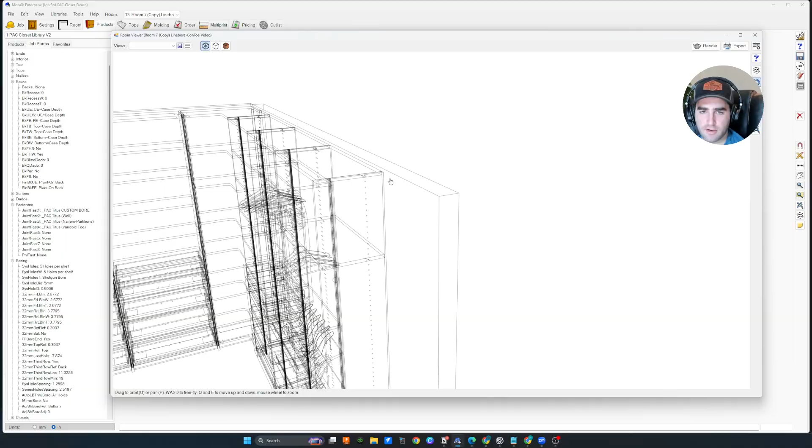I'll show you what that does, because the next thing we're going to turn off is in Boring. All three of these top parameters are going to be set to shotgun bore. You're just going to go in here and select the one you want. Let's do 5 holes per shelf, referring to the adjustable shelf.

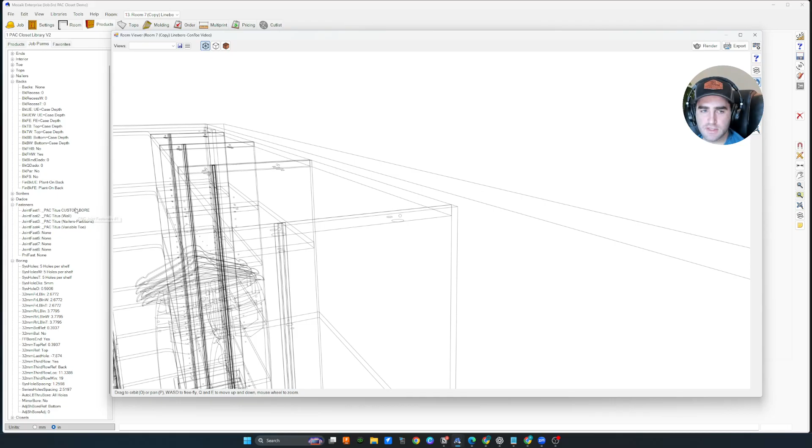You'll see now that we've turned those off, we still have holes. If we didn't use this custom bore fastener, those outriggers do not make their own holes with the original tool group - it's relying on the line bore being in the right place, which has its advantages. But for custom bore, we have to turn on the custom bore fastener. If you don't have that, it'll be in this lesson and you can just download it.

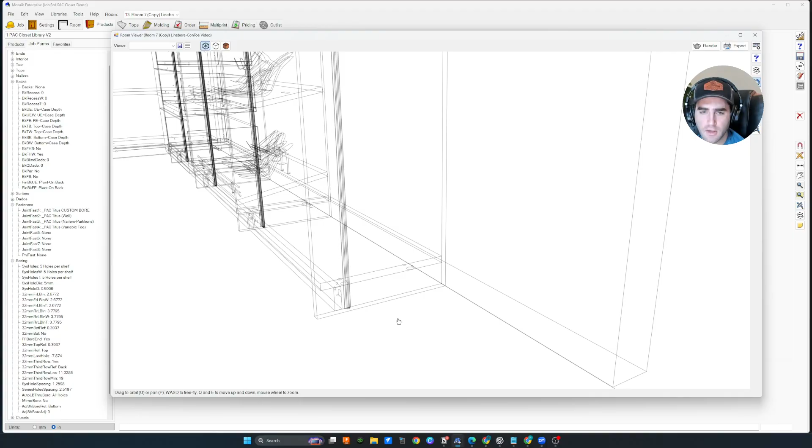Other things that we're going to see here: these outriggers down below have their own holes, the fixed shelves have their own holes. As long as all that looks good, you're decent on the fasteners.

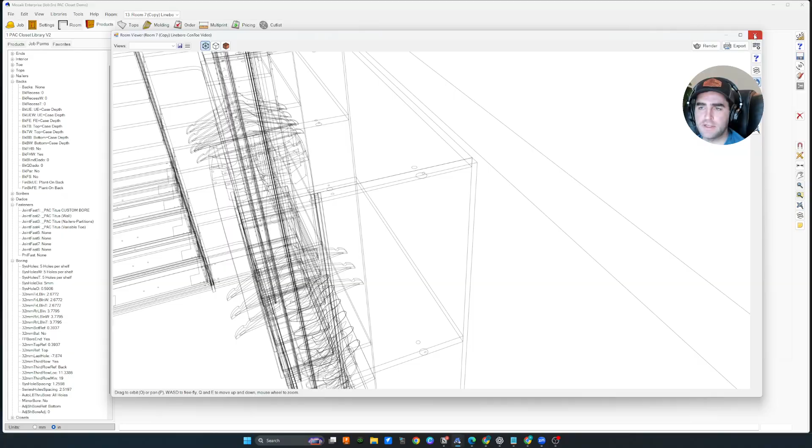Now we do obviously have this LED channel in the wrong place. I was probably messing around here.

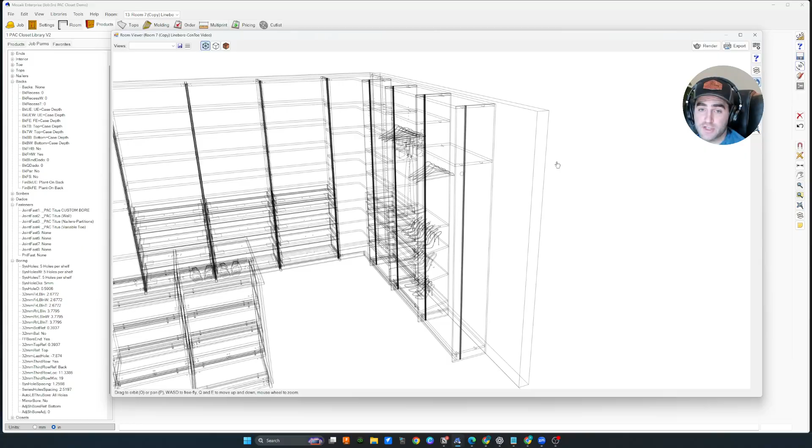The other thing we want to look at, and really want to think about, is that now that we don't have holes for our closet rods and our fixed shelves are custom boring, it really matters where these things are positioned. So you just added a bunch more work to your manufacturing checklist, because when we go into elevation, wherever these fixed shelves are located, that's where they're going to drill holes. So we no longer have that kind of adjustable nature, which is fine.

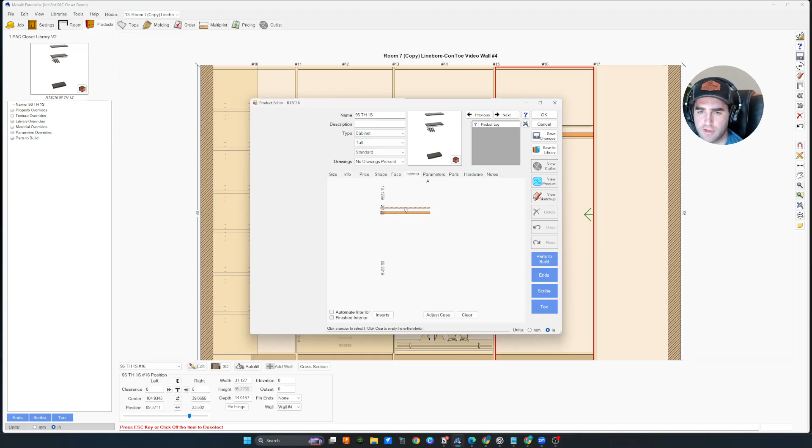It's not a big deal. You just have to double click and edit, go in the interior tab, and move these things up and down. So you want to move your fixed shelves - if this matters to you, this is a long hang, it had it at 70 inches. It doesn't matter, I'm going to move this up.

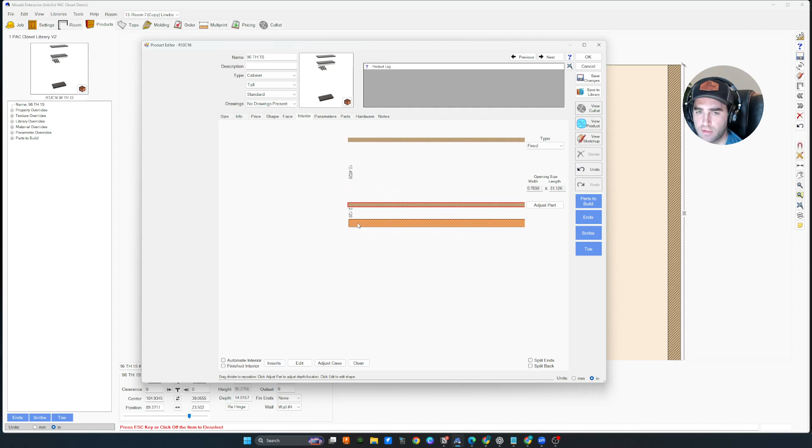When you do this, when you move the fixed shelf, make sure that your closet rod still has the same amount of space, 2 1/8 inches, inside this little box here. If it doesn't, it will be drilling holes at a different height.

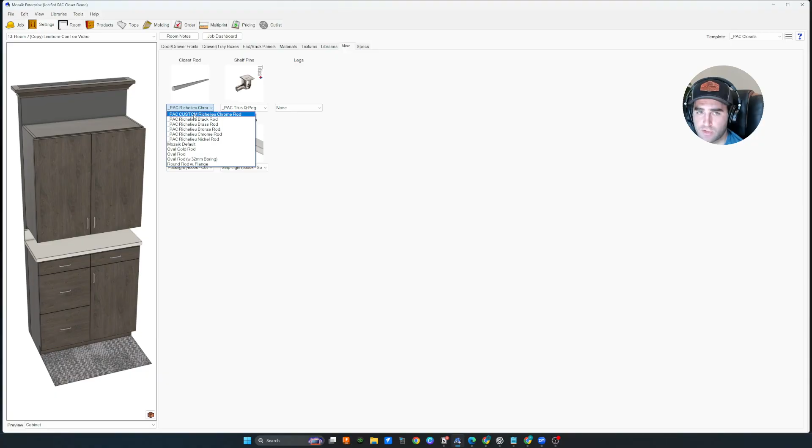You can leave the holes off for your closet rods, or you can bore for your closet rods. If you go to settings, and then if you go to miscellaneous, in closet rods, you can pick the PAC custom boring closet rod. And then if we go back into the room, you don't have that.

It'll also be a download. Kind of useless if you don't have the actual library, but anyone could download it.

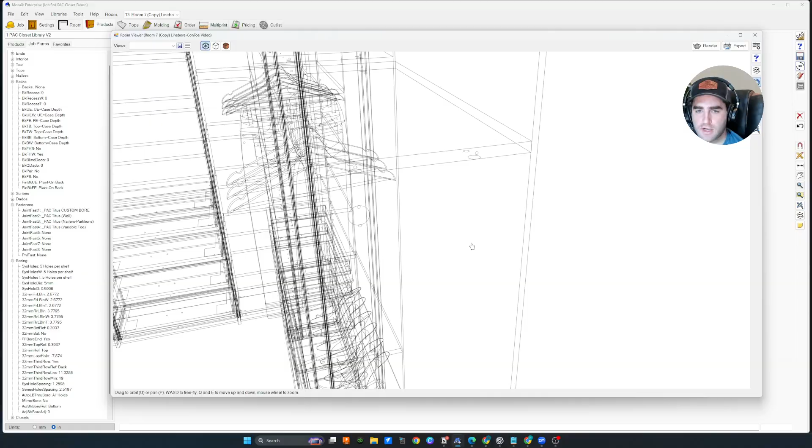Okay, so now when we look at this closet rod, obviously our LED is still a little bit too close, but we can move that very easily. Now the closet rod makes its 2 holes. So if that's not in the right height, you're going to have 2 kind of random holes.

Not going to be good. So just check it over and make sure these are all at the right height. If you need to, you can just rebuild the interior section.

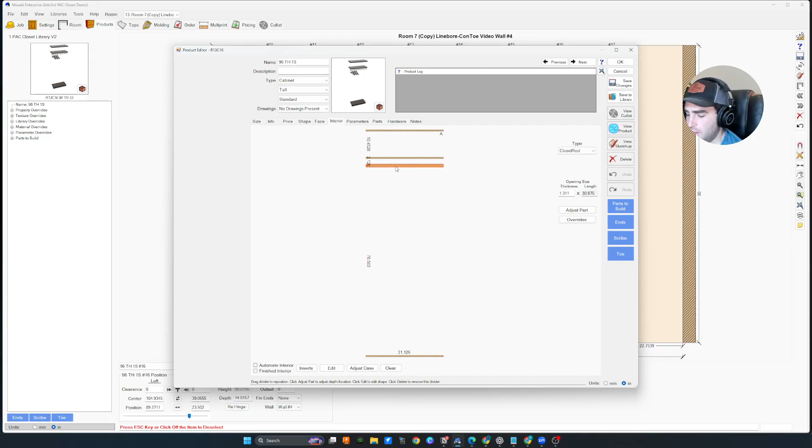One kind of quick trick for getting these closet rods, if they're refusing to get back into 2 1/8 spacing, you can just delete them and make another one, and when you make one, it will go to that 2 1/8 spacing every time.

All right, so other considerations for this line bore being gone. One important one would be for angled shoe shelves. You need all the holes for angled shoe shelves, otherwise they won't be adjustable. You can make them fixed shelves, but that's just weird and risky unless you really, really have those heights defined.

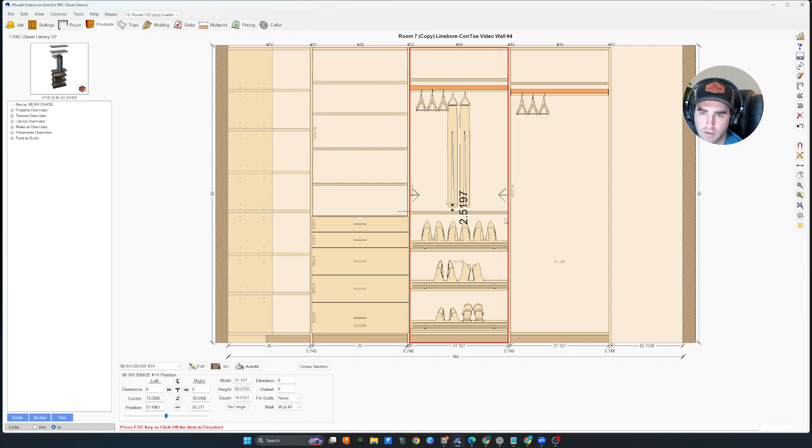So this angled shoe shelf right here, we've got line bore turned off for the whole library. So what you'd want to do is edit, go into parameters, select product parameters. We'll go into the boring category. We'll bring in the top one and we'll change it back to line bore, well, shotgun bore.

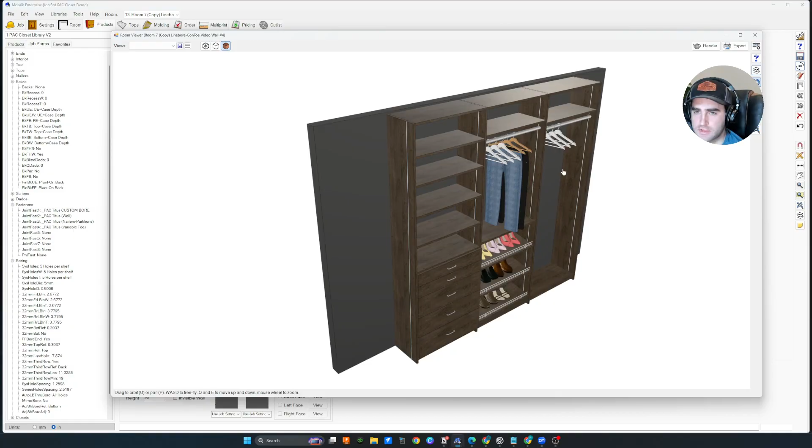When I say line bore for the PAC library, I really mean shotgun bore, but anyway, so it's turned back on for this section. The whole panel on both sides, left and right, has holes now. And in a wireframe, we've got holes in here, which is cool, but we really only want them down here.

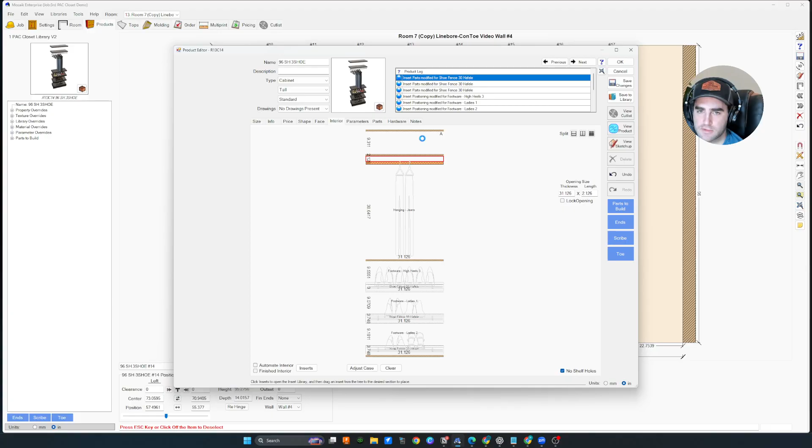You probably already know this trick, but we can edit the interior, click on the opening, and on the bottom right, we can say no shelf pins. And no shelf holes. No shelf holes for all of those.

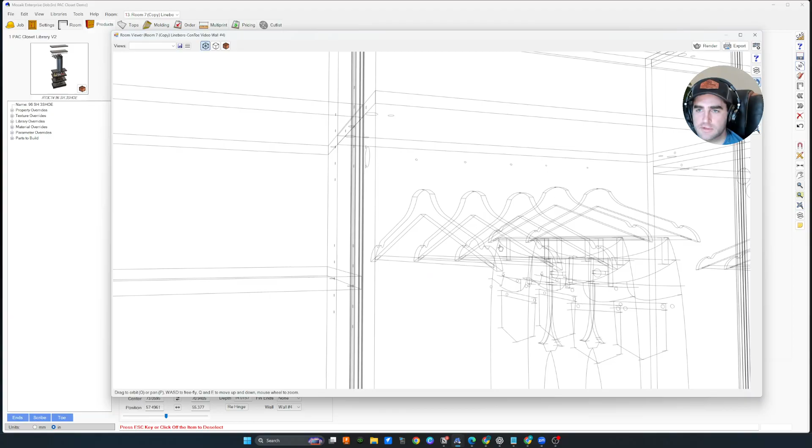We might still get a couple stragglers. We can look at it. Oh, 3D, we'll go in a wireframe. On in here. Pretty darn good. All right, so no problems there. Everybody's happy.

Okay, and any other consideration here would just be making sure that you have the variable toe fastener group on. Pretty much everyone should have that built in automatically. If not, you can activate that here in the fasteners group. That just makes it so that you can change the toe recess and still have the toe boring.

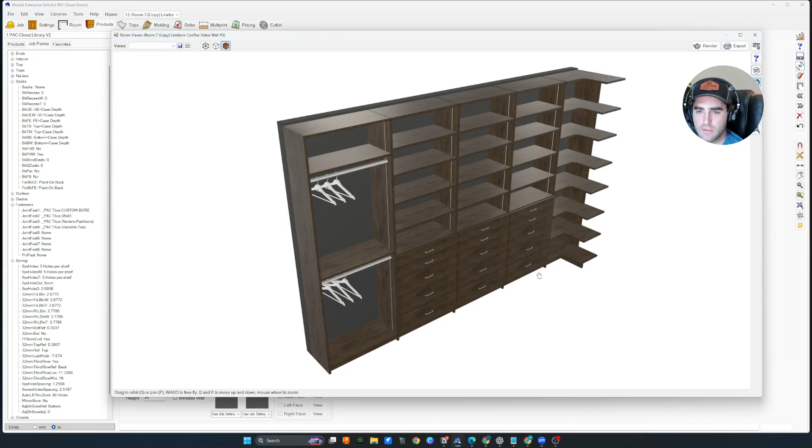And your drawers are still going to bore their own holes, which is great. So if we go to cross section for these drawers, it can be a little overwhelming, but we can see that we just have holes for our actual drawer guides. We don't have a bunch of line bore in there. It's actually kind of nice.

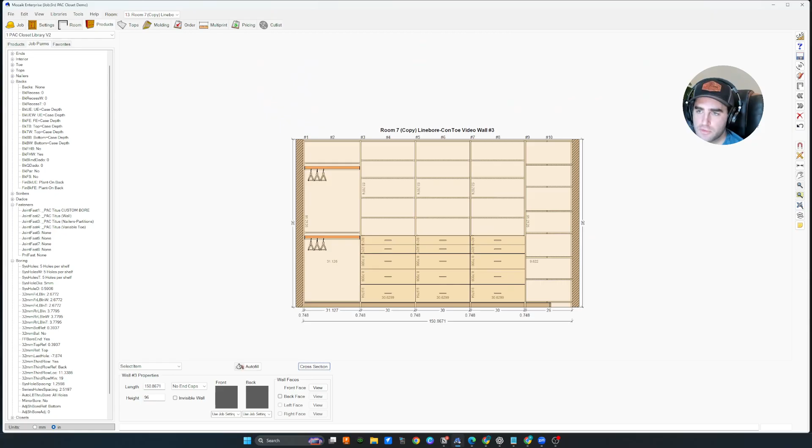So in conclusion, you can do full line bore, not that big of a deal. Just make sure that you know it requires a little more manufacturing check. These fixed shelves are going to look funny to install like this, so you have to go into the interior tab and adjust them. Where you have something placed, there will be holes there, so that really matters.

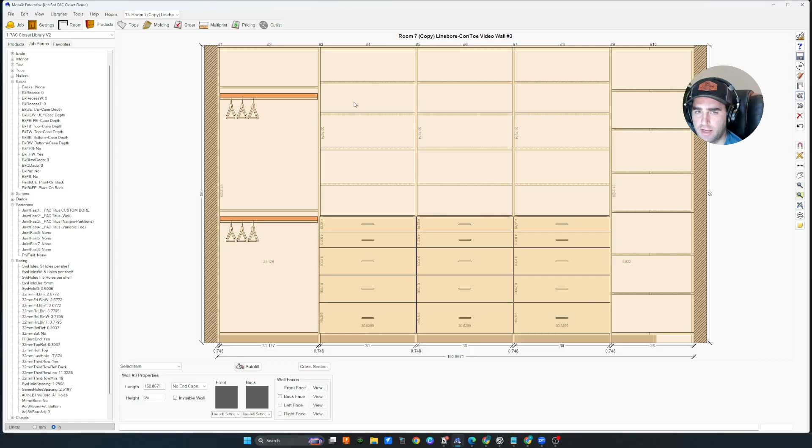And pulling out of the library, most of those top shelves should be fine. This situation here would be a-okay, but this one, not so much. It's a little too close. You could also just not bore for your closet rods and bore for them on site.

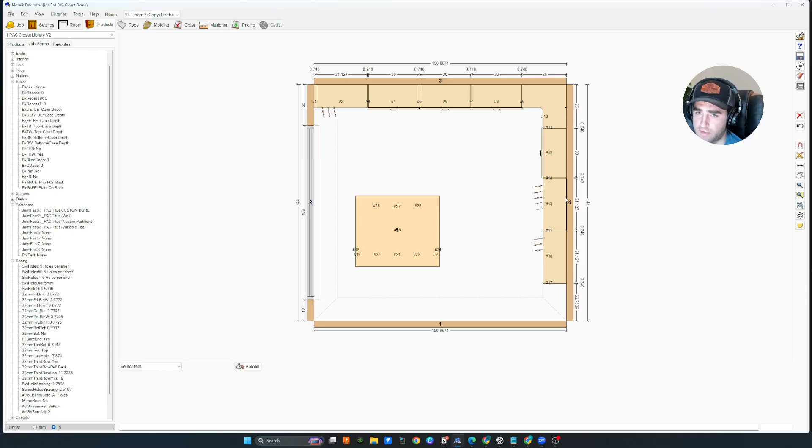We'll make another video on if you want to change the base depth of 14-inch cabinets to 16 and what considerations you have to take there. It actually works best with custom bore, really. And that's all we really have to talk about for activating full line boring for the PAC closet library.